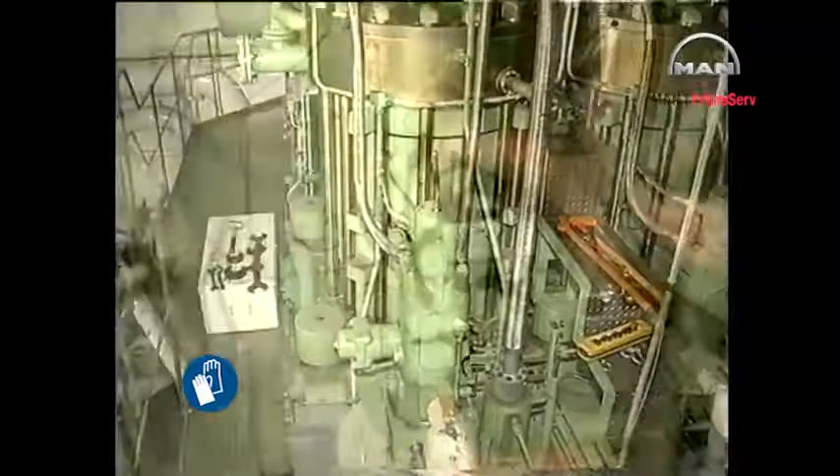Before any dismantling, drain the fuel oil from the fuel oil high pressure pipes. Using a hook spanner, loosen the union nut. Using a spanner, loosen the coupling fitted on each end of the high pressure pipe.

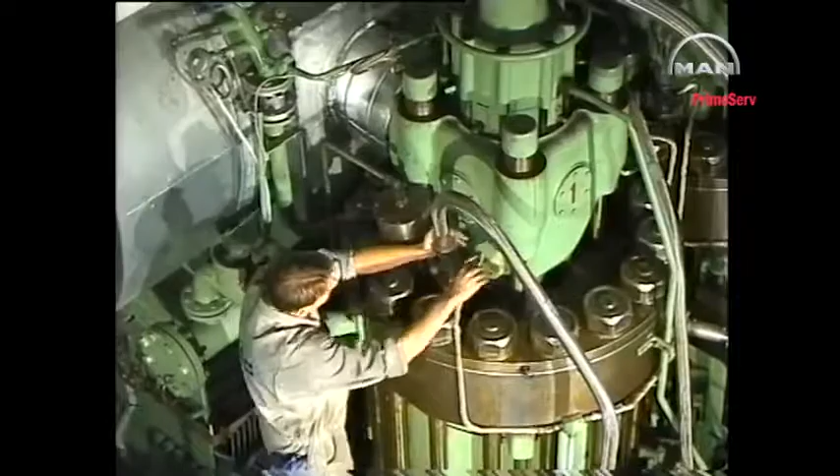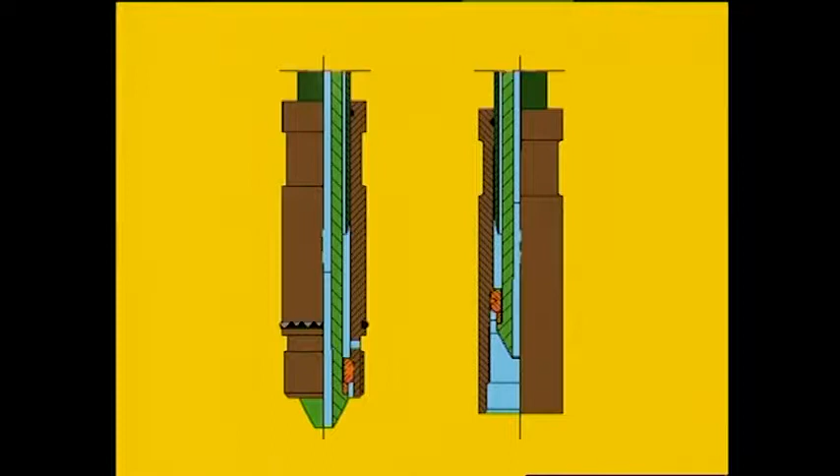The fuel oil high pressure pipes may also be of the double pipe design. See Instruction Book, Procedure numbers 901 and 909. Remove the high pressure pipe, taking care not to damage the high pressure pipe seatings.

Disconnect the return oil pipe from the fuel valve. Mount protective plastic plugs in or on all high pressure seatings. Unscrew the retaining nuts and remove the spring housings.

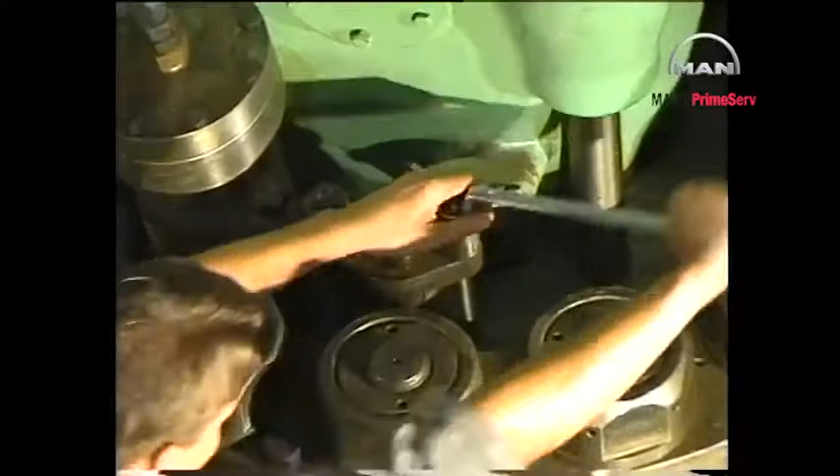Remove the fuel valve from the cylinder cover using the lifting tool if the valve sticks.

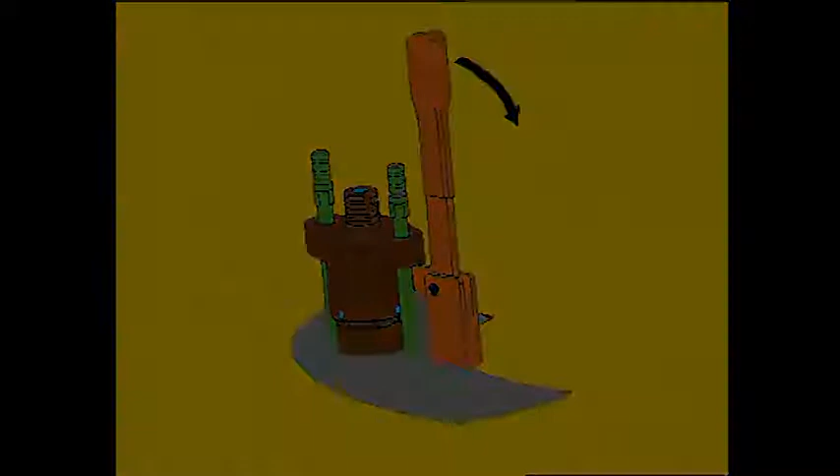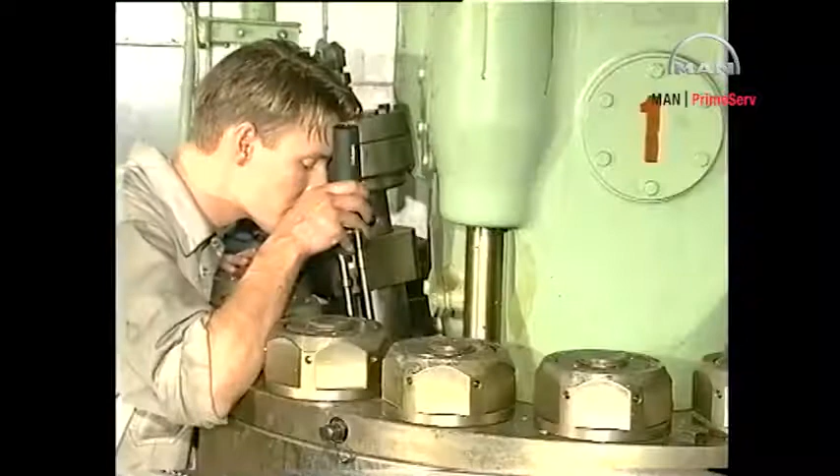Thoroughly clean the fuel valve bore in the cylinder cover. Clean off any carbon deposits in the fuel valve bore with a carbon cutter.

If marks are found on the seating in the bore, recondition the seating with a seating face cutter. Finally, grind the seating with a grinding mandrel and a grinding compound, for example carborundum number 200.

After milling and grinding, thoroughly clean the bore and seating and check again that there are no signs of damage on the seating.

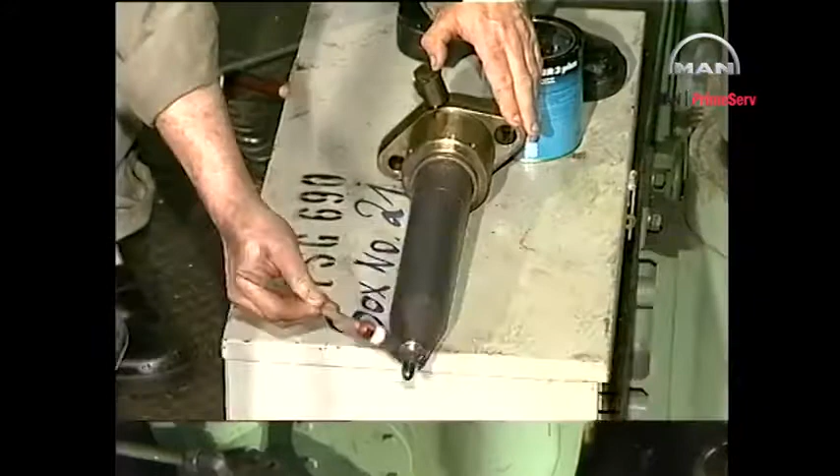After reconditioning the seating in the bore and thoroughly cleaning both bore and seating, fit new O-rings on a new or overhauled fuel valve which has just been pressure tested, and lubricate with molybdenum disulfide. Carefully mount the valve in the cylinder cover.

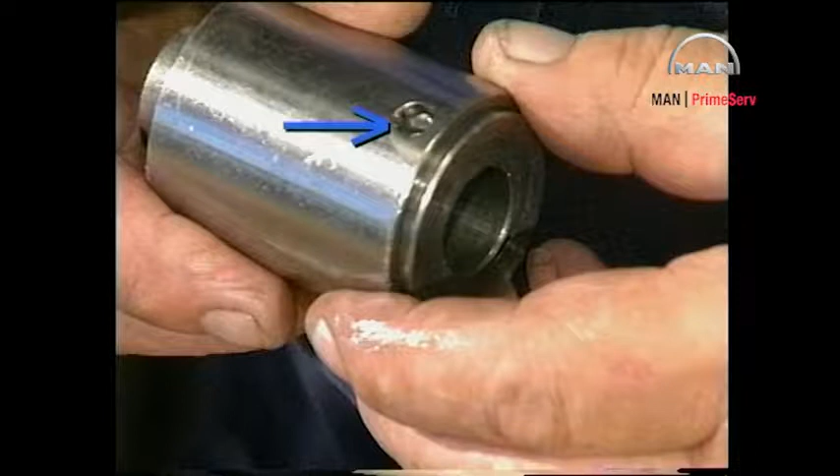To ensure that over-tightening has not taken place, check that the locking and indicating pins have not been bent or broken off.

In the event of over-tightening, mount a new spring housing. We recommend that the calibration of new and especially old spring housings be checked before they are mounted on the engine or on the fuel valve test rig.

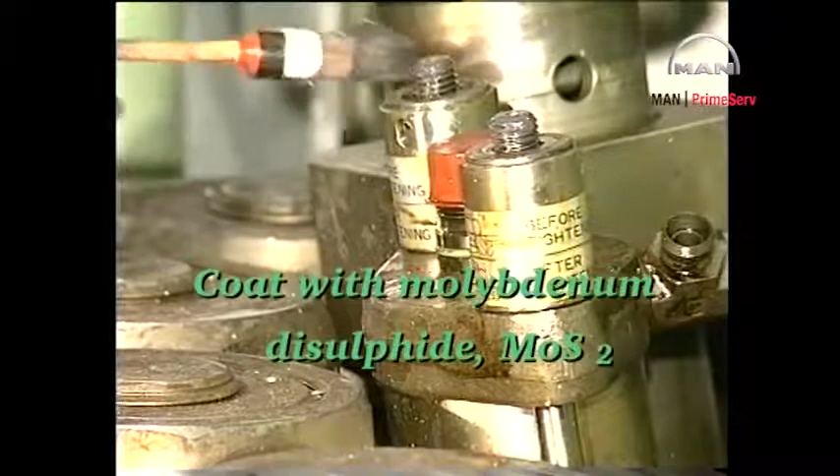Mount the spring housings and retaining nuts. Tighten the nuts until the top face of the pressure disc is flush with the top face of the spring housing.

Reconnect the return oil pipe to the fuel valve.

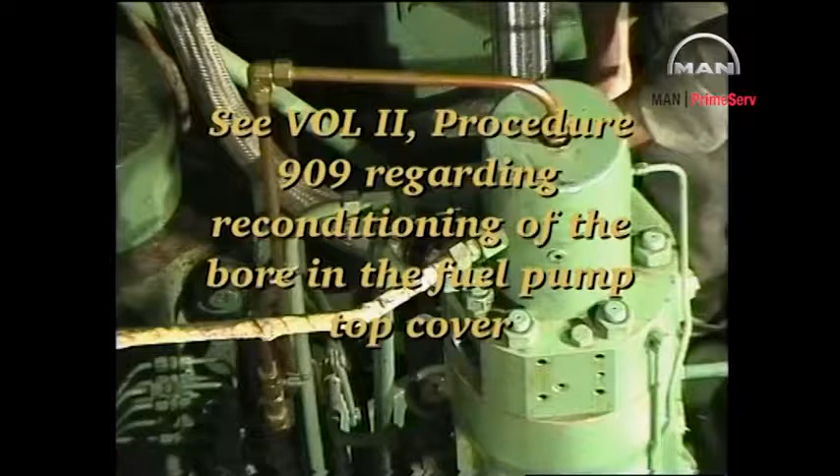Check that there are no marks on the seating surfaces of the fuel oil high pressure pipe. If necessary, recondition the seatings as described in procedure number 909.

On fuel oil high pressure pipes which are provided with a steel armoured protective hose, also check distance D, that is between the thrust bushing and the pipe end. See procedure number 909.

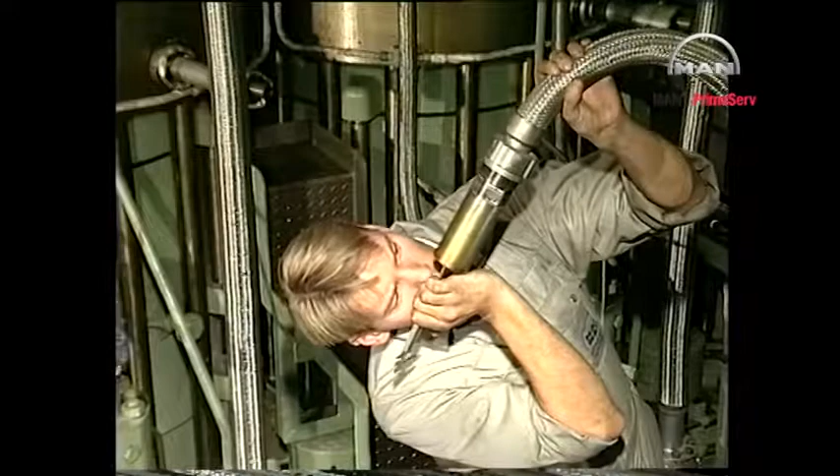Replace the O-rings and coat with molybdenum disulfide. Mount the fuel oil high pressure pipe.

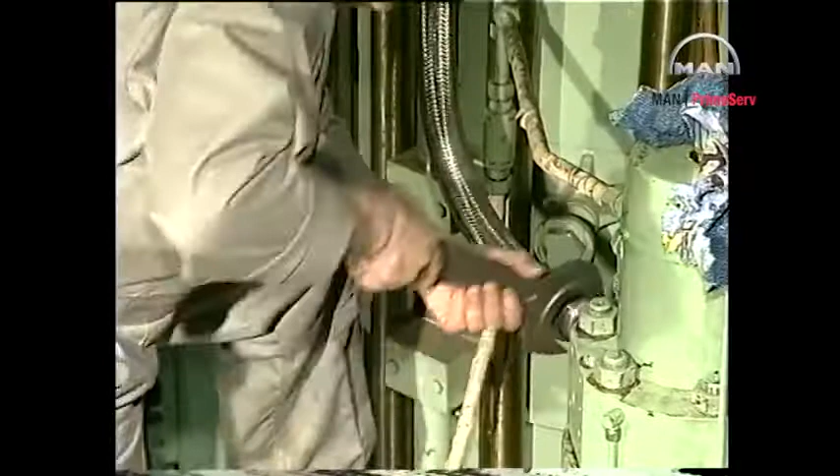Adjust the torque spanner to the value indicated in procedure number 901. Tighten the coupling pieces using the torque spanner. Using the hook spanner, tighten the union nut.

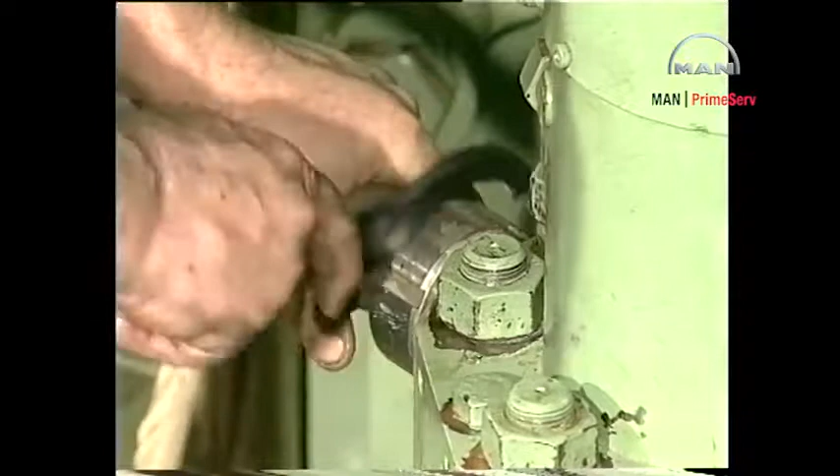Close the fuel oil drain valve. Turn on the fuel oil supply.

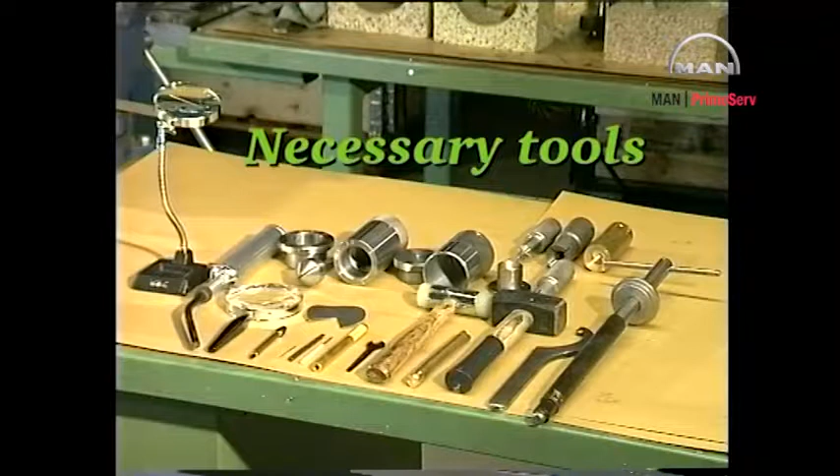Remove the sealing rings and the plastic plugs.

Set up the fuel valve in a bench vise provided with soft jaws. Start disassembling the fuel valve by screwing off the union nut with a hook spanner. When overhauling fuel valves, handle all parts with the utmost care and keep them completely clean.

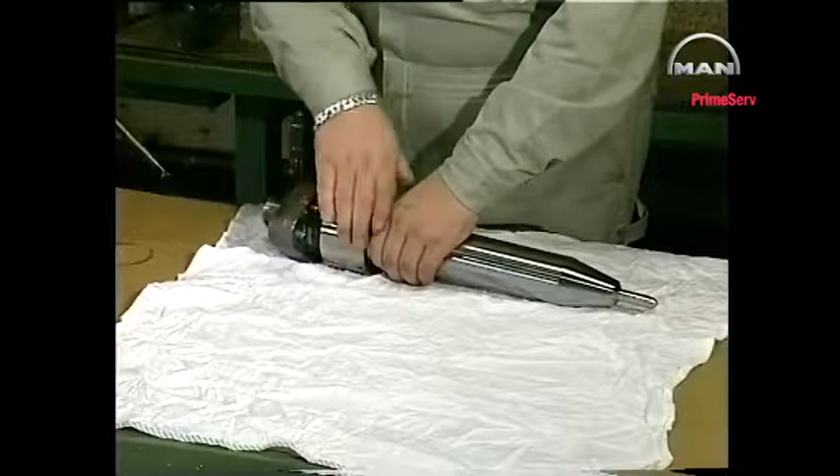Slide the valve head clear of the valve housing. Remove the non-return valve, thrust spindle and thrust foot from the valve housing.

Loosen the spindle guide with a soft hammer and remove the spindle guide and nozzle.

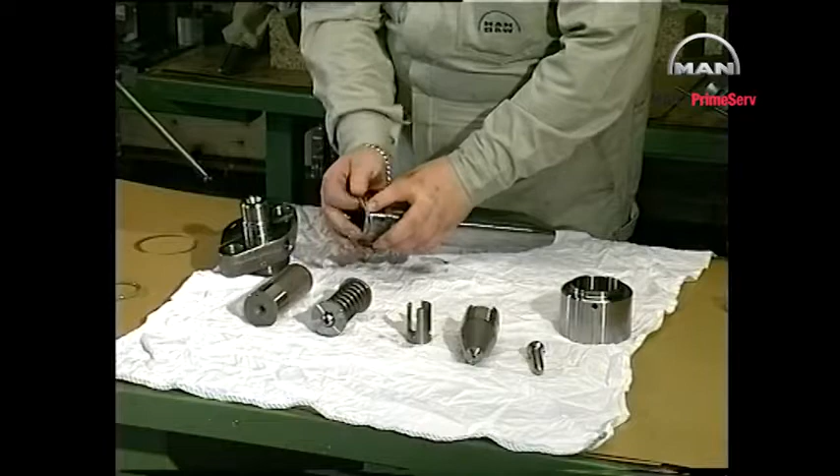Remove and discard all sealing rings. Clean all parts in gas oil and blow clean with compressed air.

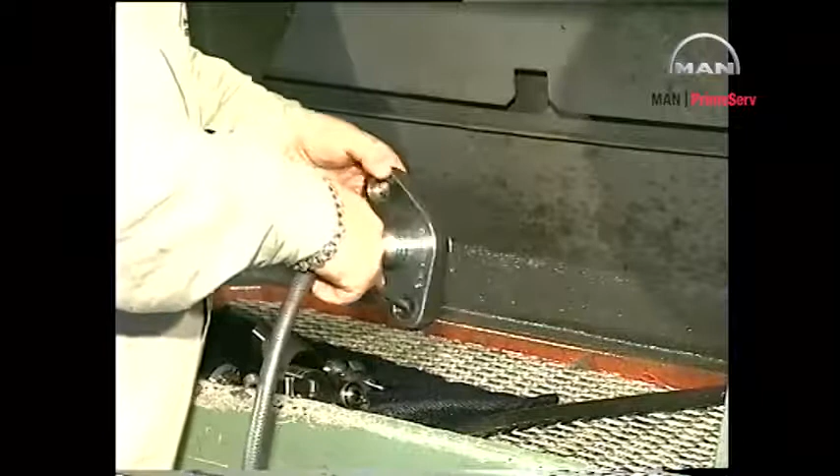Carefully clean and examine the parts and, if necessary, grind the seating surfaces with a grinding mandrel and carborundum number 500.

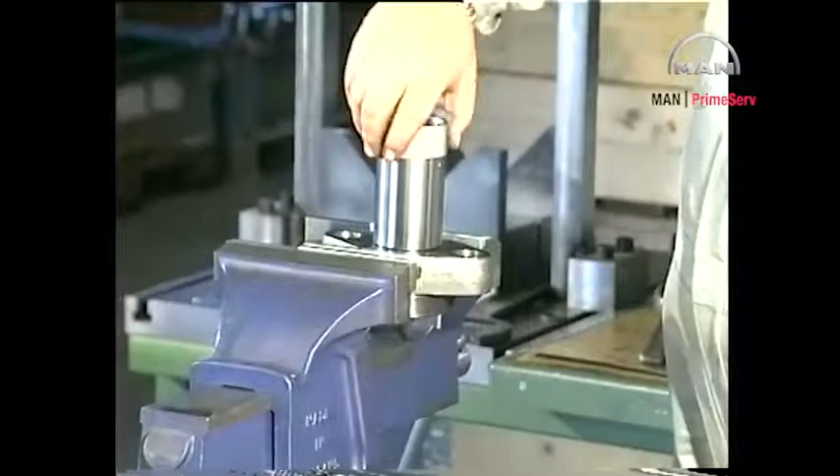Use the milling or grinding tool if more serious damage has occurred on the seating surface for the high pressure pipe in the valve head.

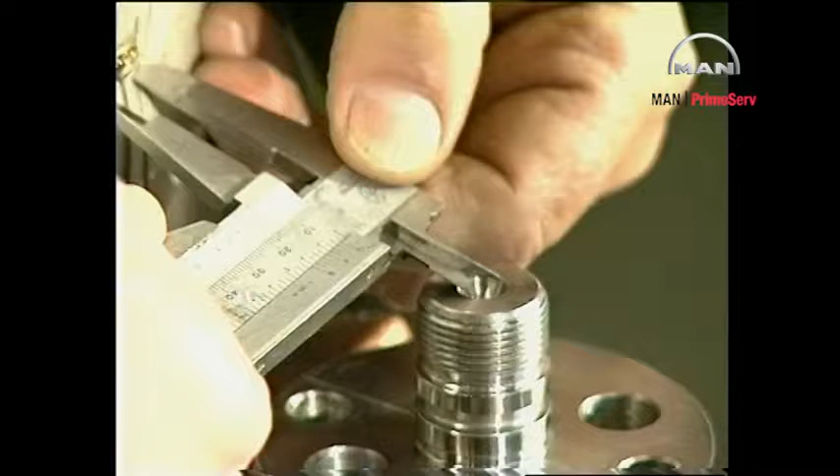Use the milling tool if more serious damage has occurred on the seating surface for the high pressure pipe in the valve head. The diameter of the seating surface must not exceed the value stated in procedure number 909 in volume 2 of the instruction book.

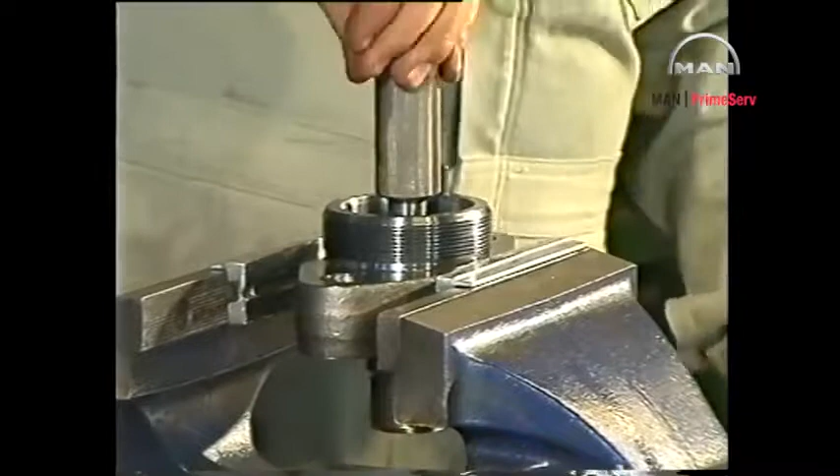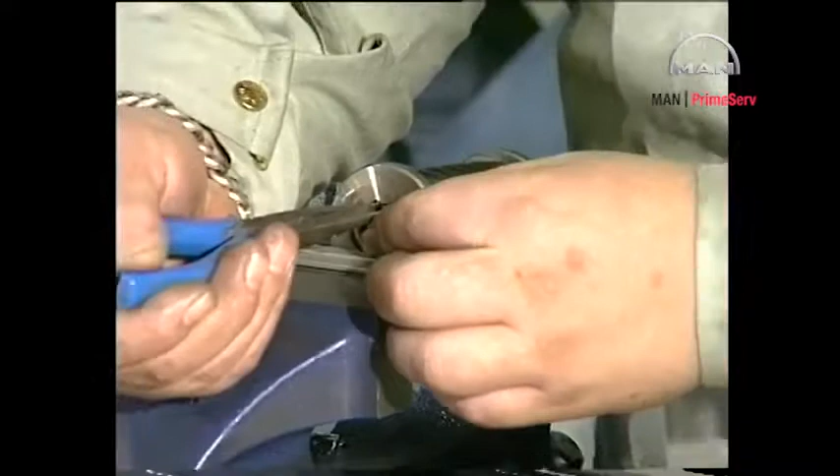Set up the thrust spindle in a bench vise with soft jaws. Compress the spring for the thrust spindle to remove the tension on the circlips and then remove the circlips.

Carefully clean and examine the parts and, if necessary, grind the seating surfaces with a grinding mandrel and carborundum number 500.

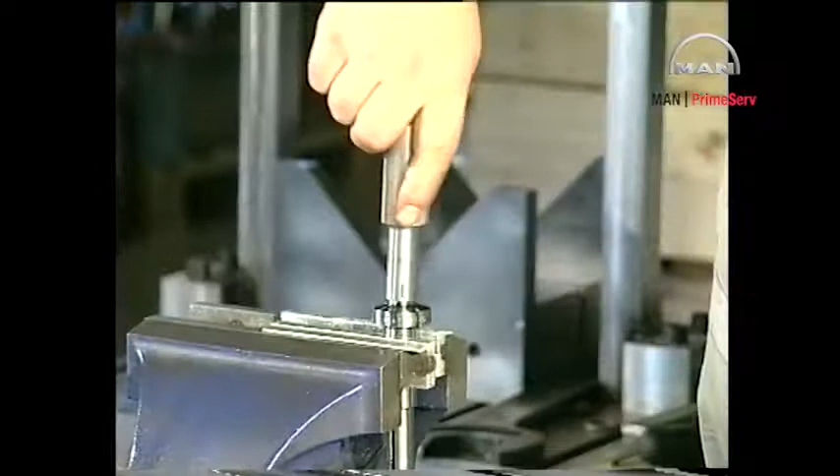Remove the sealing ring from the spindle guide. Disassemble the spindle guide with a brass mandrel and a hammer.

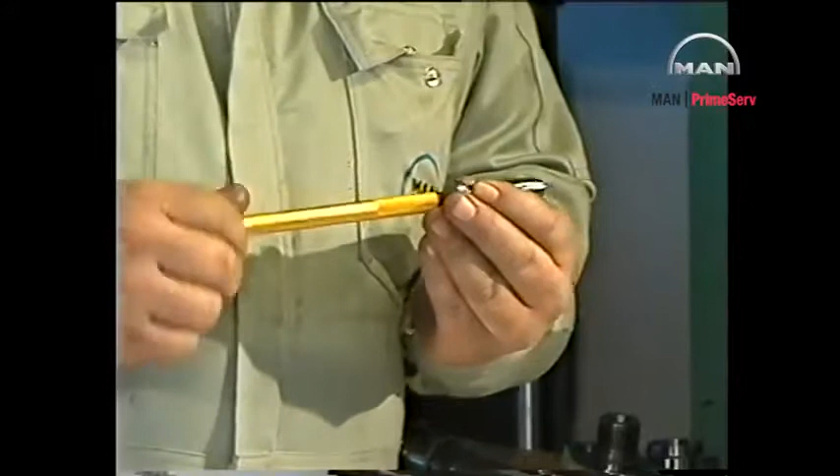Use the special drills to clean off any carbon deposits in the central bore of the fuel valve nozzle or in the spray holes.

Test the spray holes with a test pin. If the test pin can be inserted into just one of the holes, or if the holes have become oval, the fuel nozzle must be discarded.

Examine all seating surfaces of the non-return valve and spindle guide through a magnifying glass with 8 to 10 times magnification. If there are pressing-in marks or the like on the seats, mount a new non-return valve or a new spindle guide. Lapping of the internal seatings is not acceptable.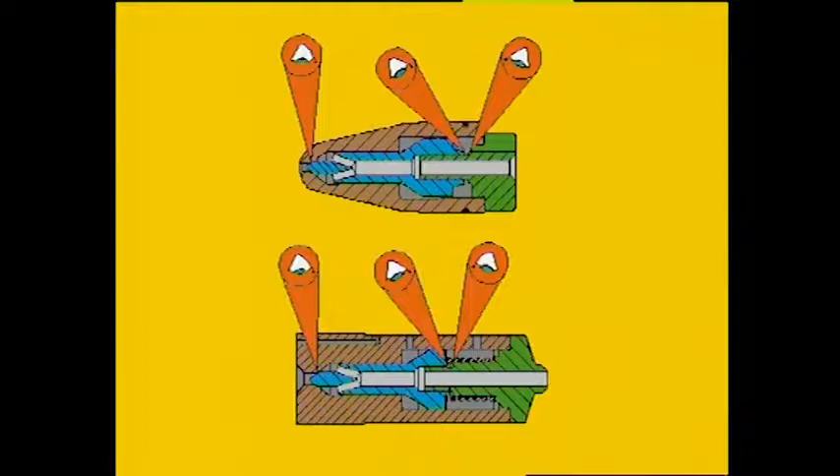Defective parts, with the exception of the spring, cannot be replaced individually.

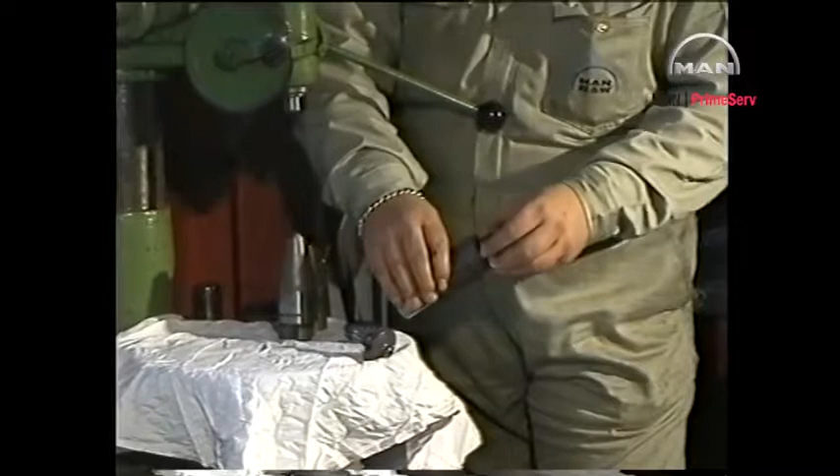Remove any deposits on the sliding surfaces with grade 360 emery cloth and oil. Lubricate all movable parts with molybdenum disulfide. Loosely assemble the non-return valve and the spindle guide.

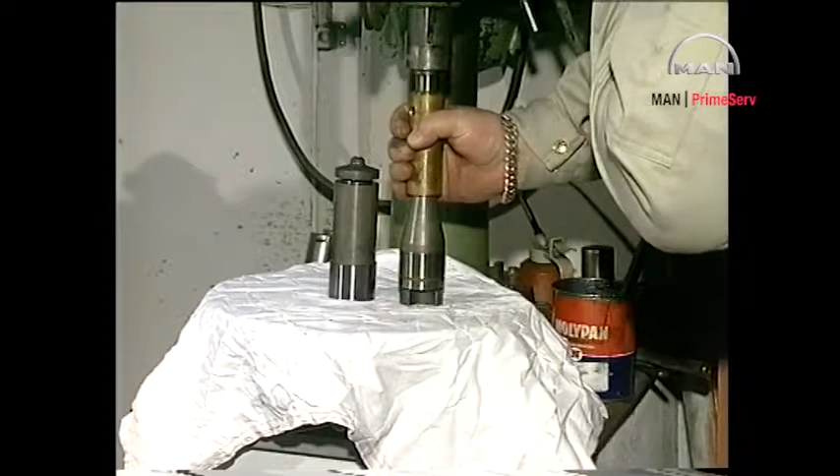Make sure that the parts are perfectly aligned and position the special tool. Fit the parts firmly together by pressing down on the drilling machine handle.

Starting with any additional discs, assemble the thrust spindle.

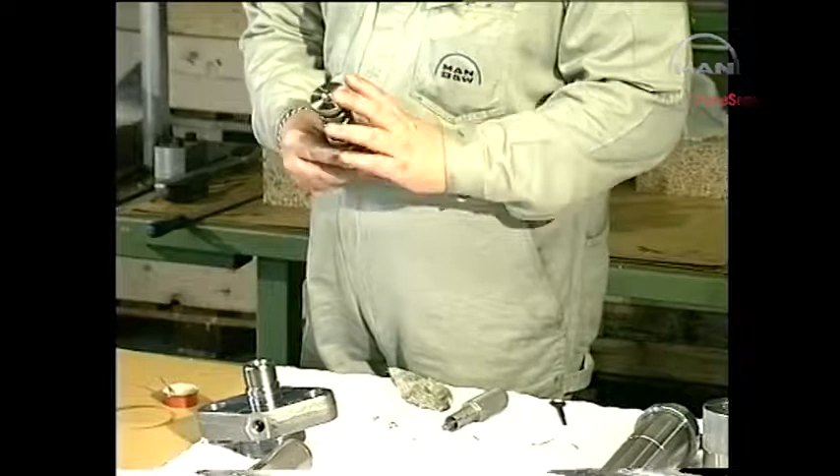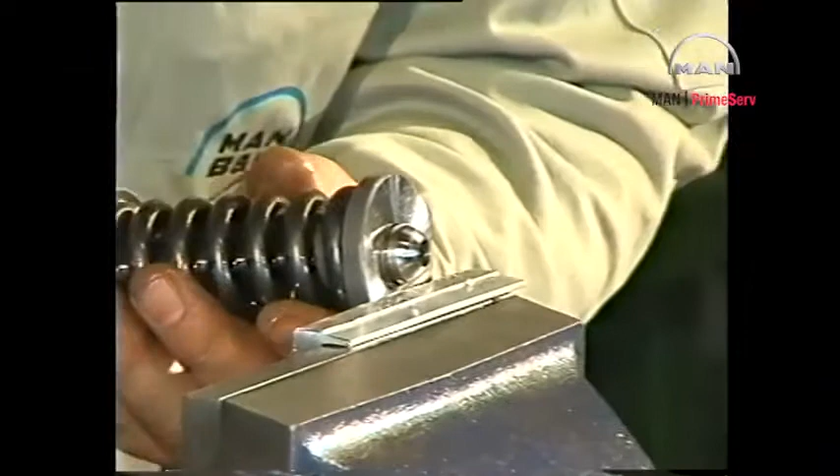Slightly compress the thrust spring and mount the circlips.

Mount the fuel nozzle in the valve housing, making sure that it engages correctly with the guide pin.

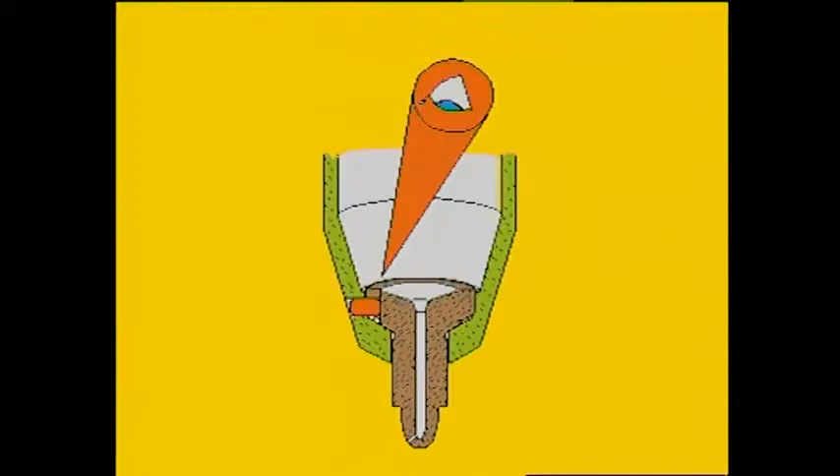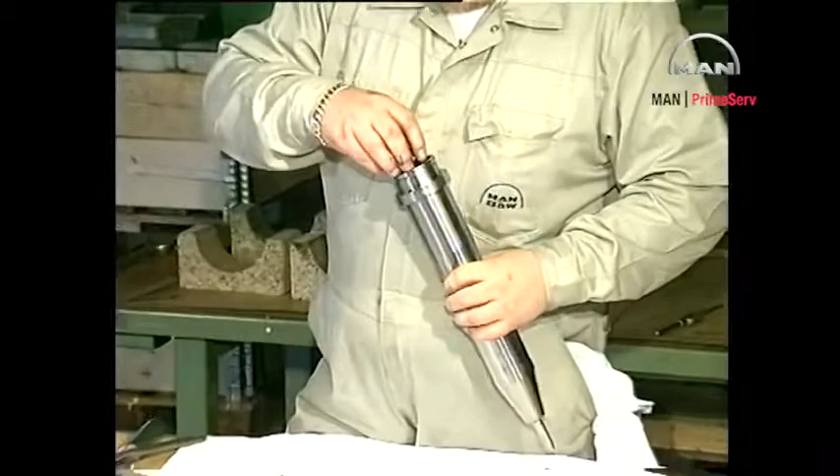Mount a new sealing ring on the spindle guide. Coat with molybdenum disulfide and mount the spindle guide, thrust foot, and thrust spindle with the circlips facing the spindle guide and non-return valve.

Mount a new sealing ring in the sealing ring groove.

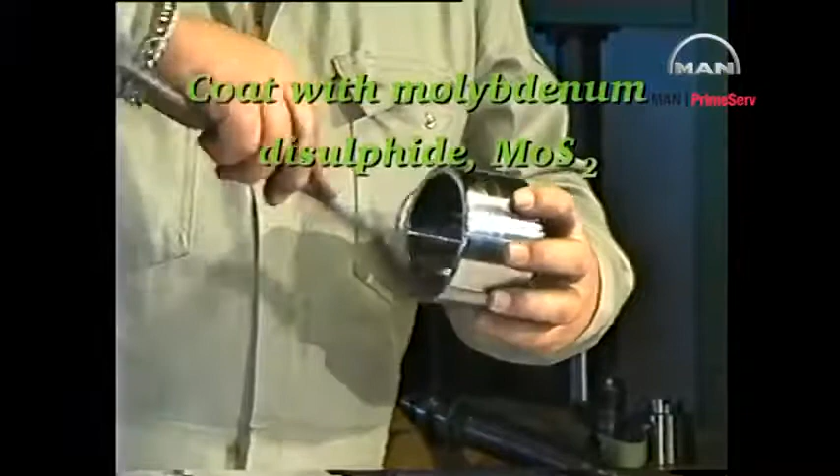Mount the valve head, ensuring that the guide pin between the valve housing and valve head is correctly engaged so that it will prevent the parts from turning in relation to each other.

Mount the union nut and tighten it with a hook spanner.

Mount new sealing rings on the valve head and valve housing and mount protective plastic plugs.

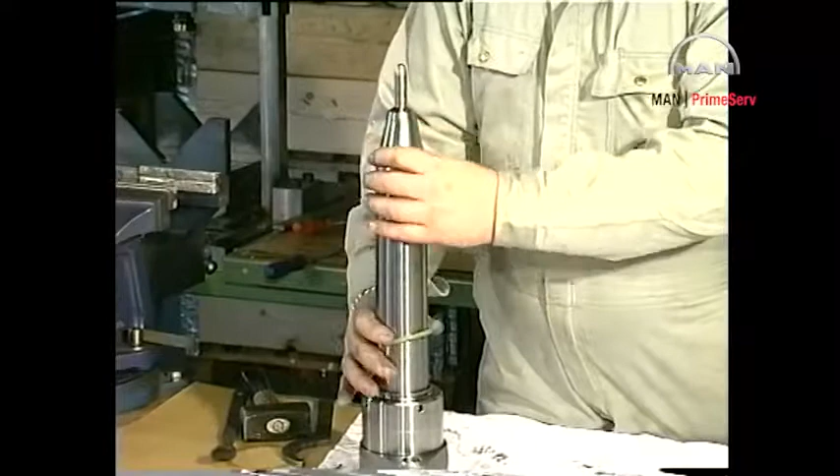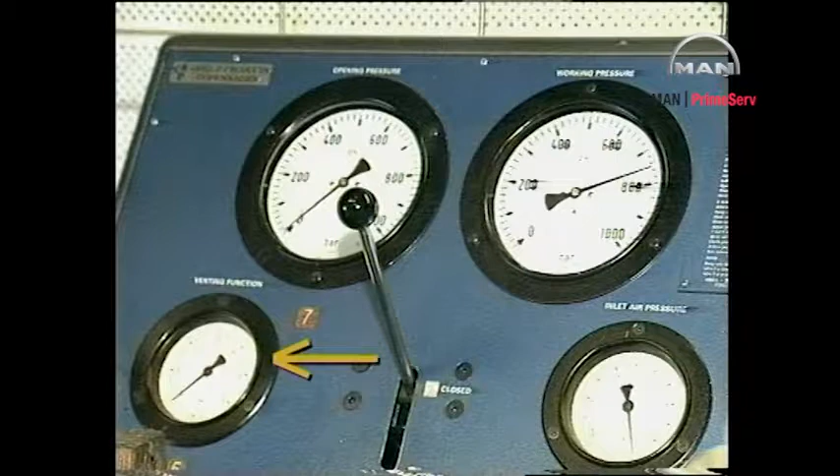Overhauled fuel valves or fuel valves taken from stock must be function tested before they are mounted in the cylinder cover. The pressure testing pump is equipped with pressure gauges for displaying opening pressure, working pressure, venting function, and air inlet pressure.

Position the fuel valve in the test rig. For guidance on how to operate the pressure testing pump, refer to the supplier's special instructions.

To ensure that over-tightening has not taken place, check that the locking and indicating pins have not been bent or broken off. In the event of over-tightening, mount a new spring housing.

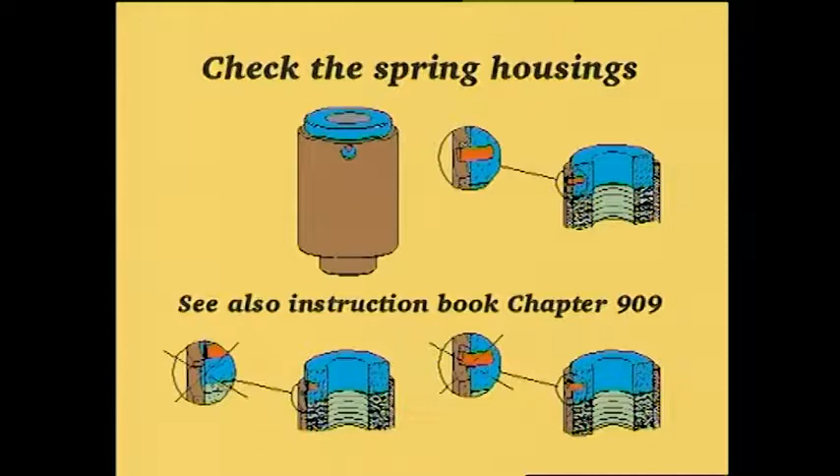A very important element in the correct functioning of the fuel valve, both during testing and in service, is ensuring that the spring housings apply the predetermined tightening force. To ensure that this force is present, a special tool has been designed to check the calibration of the spring housings. We recommend that the calibration of new and especially old spring housings be checked before they are mounted on the engine or on the fuel valve test rig.

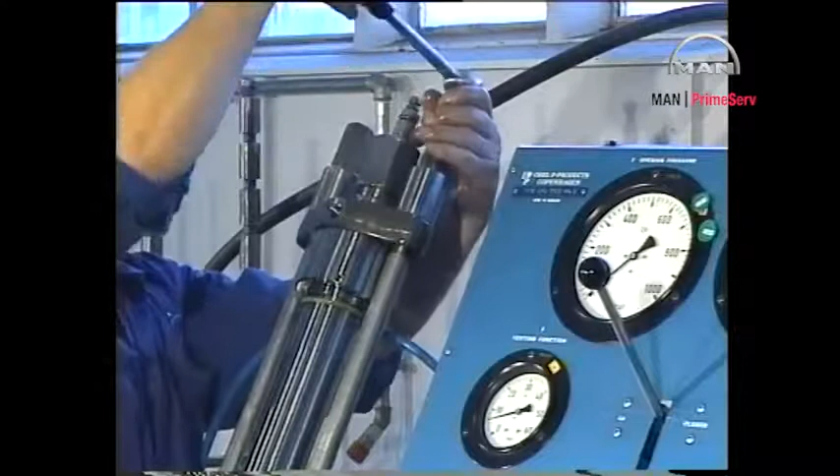Tighten the nuts until the top face of the pressure disc is flush with the top face of the spring housing.

Connect the pressure testing pump and the return oil pipe to the fuel valve.

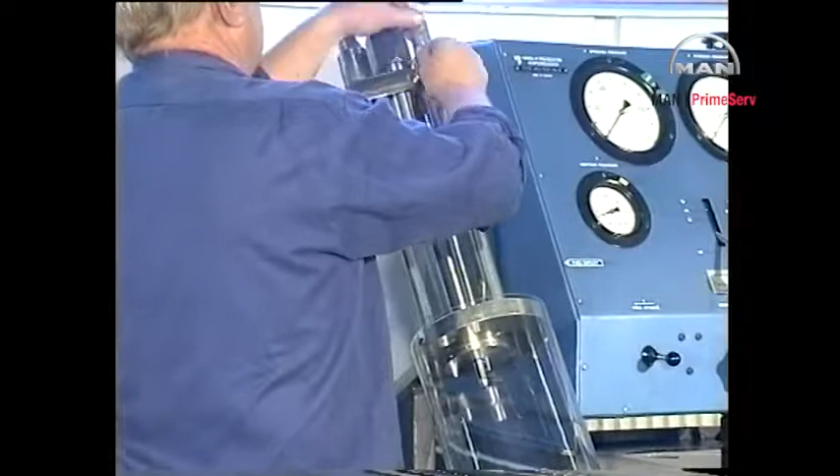Slowly fill the valve by pumping at low pressure until oil, without air bubbles, flows from the return oil pipe.

Raise the pressure until it is above the opening pressure.

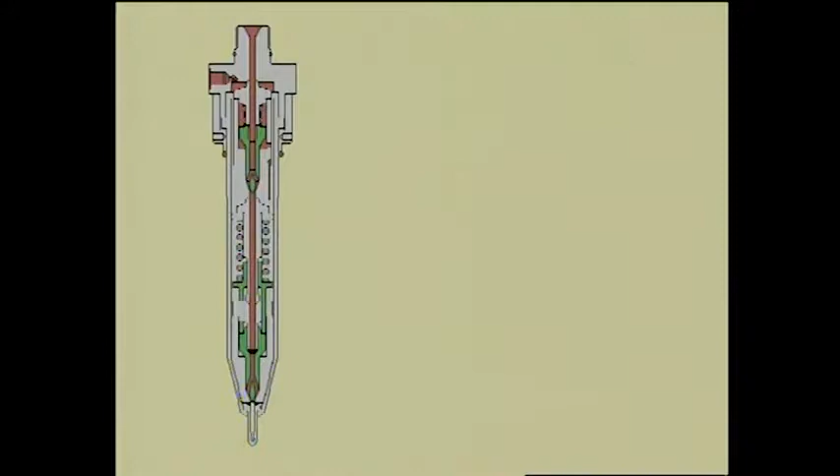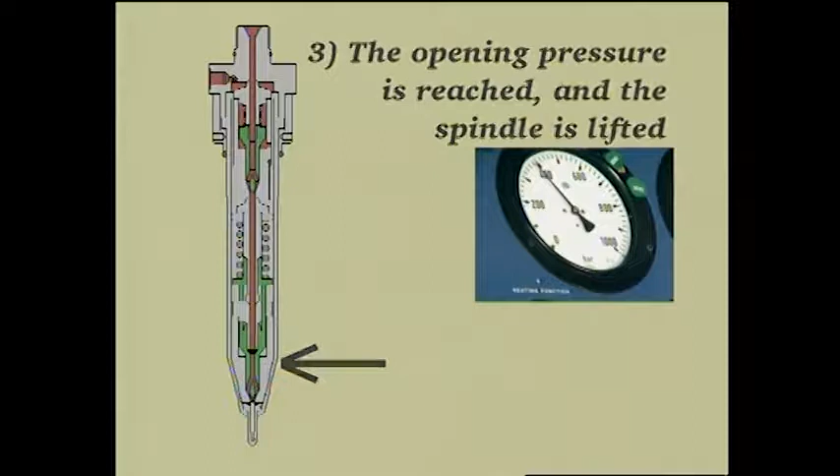Flush the valve for about 5 seconds.

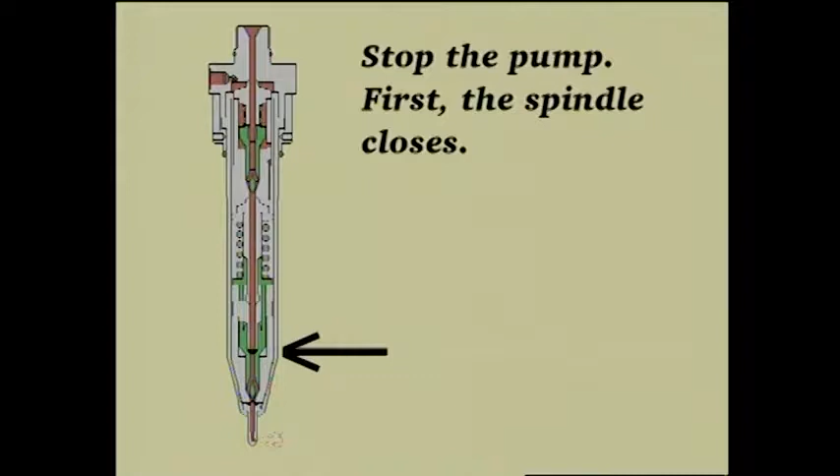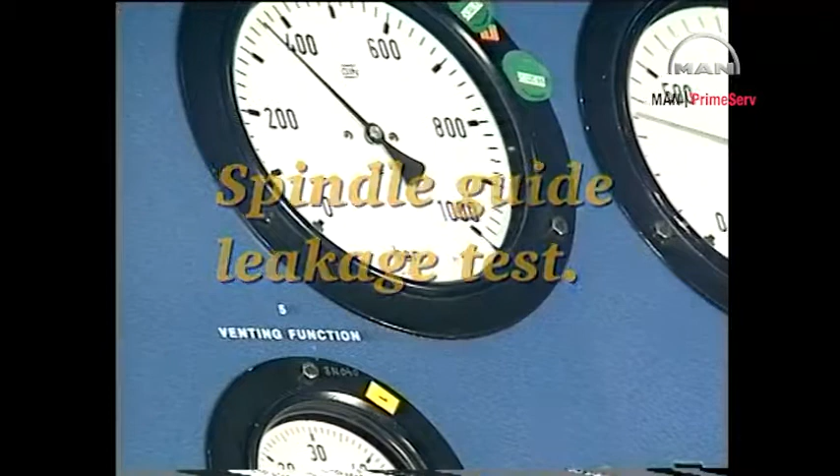Slowly increase the pressure until it is about 50 bar below the specified opening pressure. See Instruction Book Volume 2, Procedure number 909.

There will always be a certain amount of oil flowing from the return oil pipe when the fuel valve is full of oil and pressurized. Oil must not seep from the fuel valve nozzle holes until reaching a pressure of 50 bar below the specified opening pressure. If oil does seep from the fuel valve nozzles, see Procedure number 909.

Lapping of the internal seatings is not acceptable.

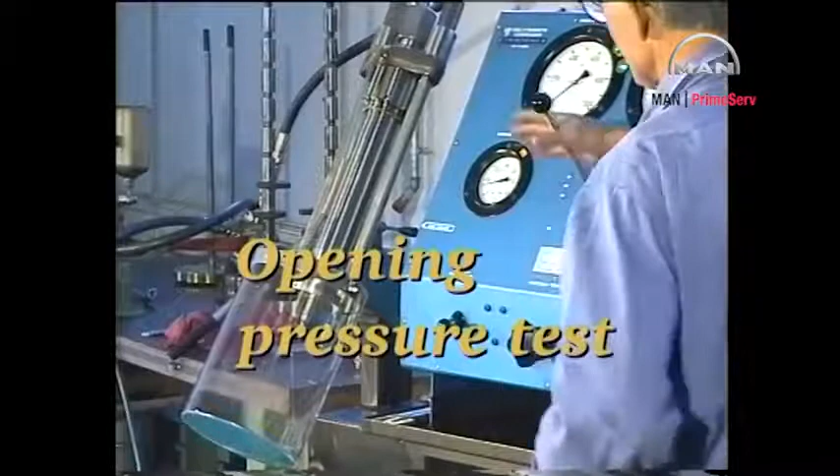Pump 5 to 10 strokes to fully open the valve and to blow out any dirt. Then relieve the pressure.

Slowly increase the pressure until oil is emitted from all the atomizer holes.

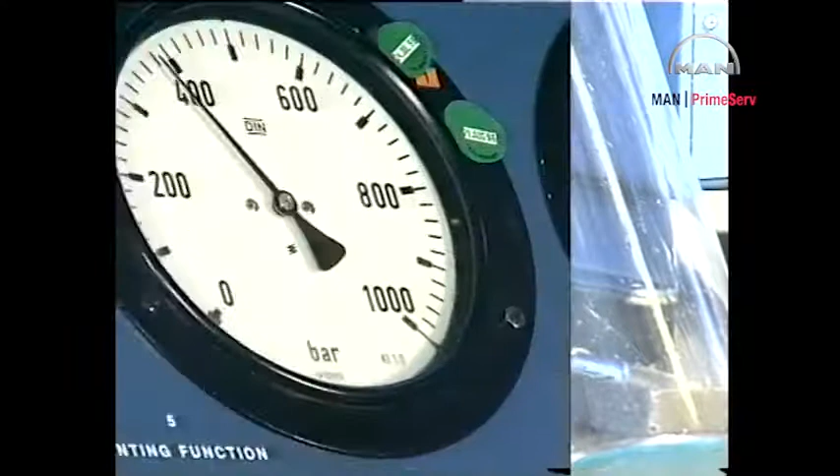Read the actual opening pressure on the pressure gauge marked opening pressure. Compare the actual opening pressure with the pressure specified in procedure number 909 and, if necessary, insert or remove discs or replace the spring.

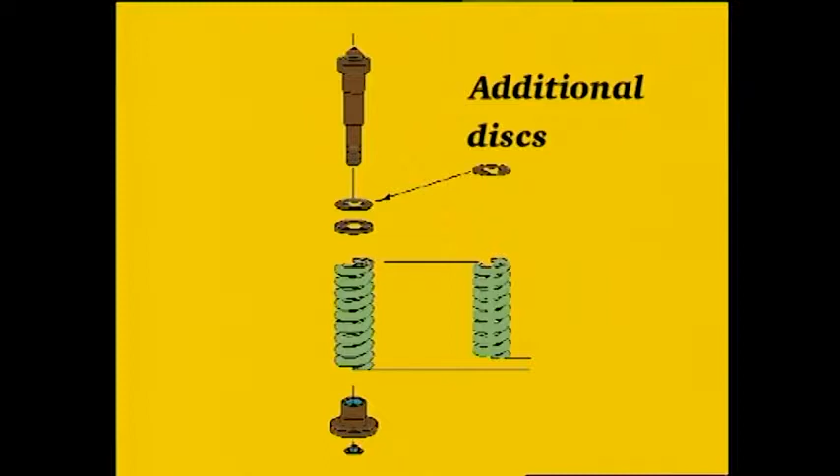Set up the thrust spindle in a bench vise with soft jaws. Compress the spring for the thrust spindle to remove the tension on the circlips and then remove the circlips.

Starting with any additional discs, assemble the thrust spindle. Do not insert more than 5 extra discs when adjusting the pressure.

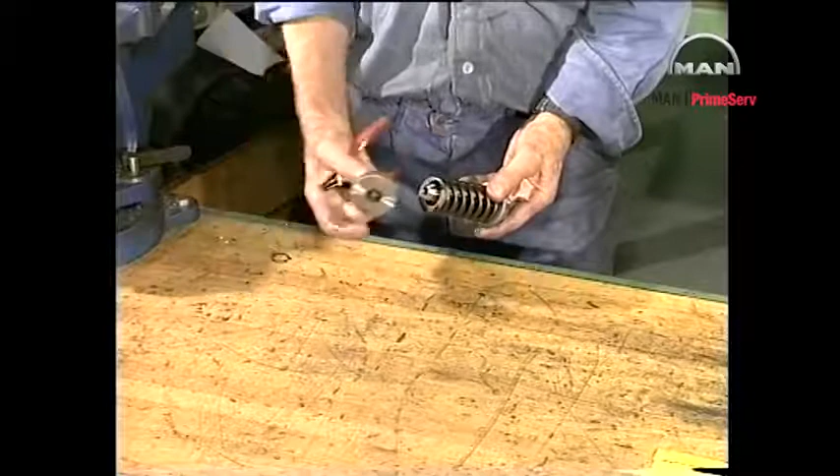Slightly compress the thrust spring and mount the circlips. The fuel valve must be retested after any adjustment.

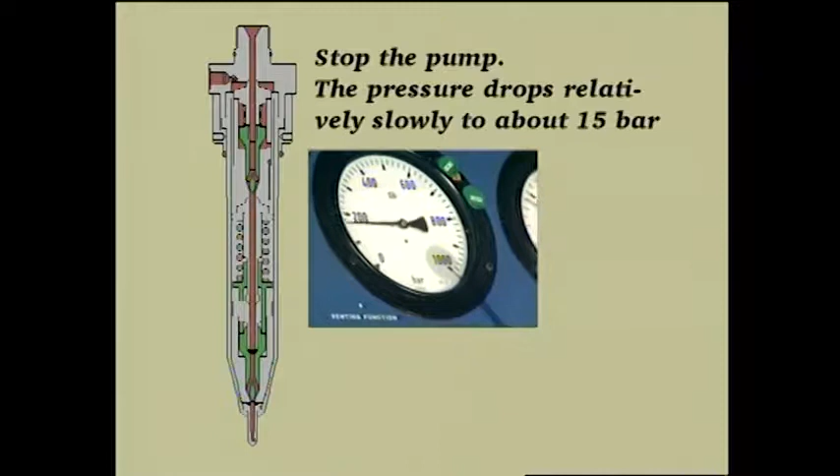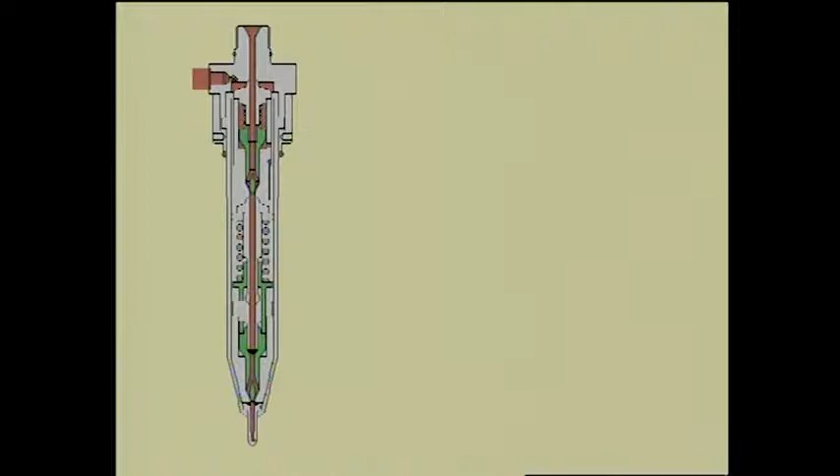If the quick pressure drop cannot be registered, the slide is sticking or the hole is blocked. Disassemble and examine the parts, replace if necessary.

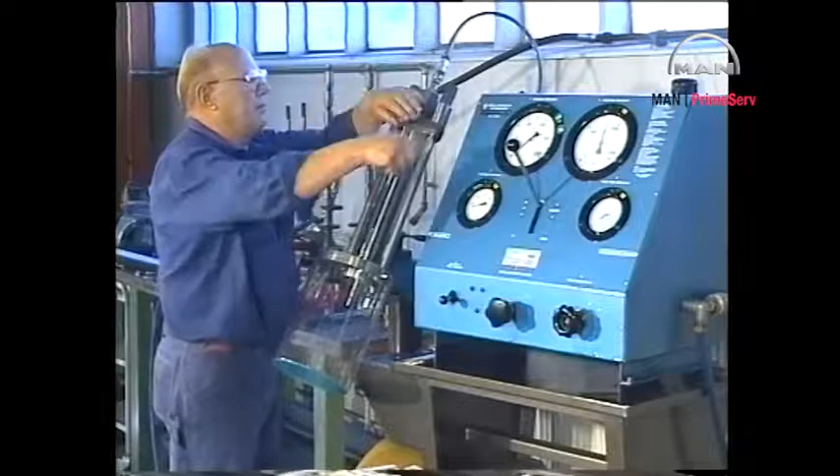Slowly fill the valve by pumping at low pressure until oil, without air bubbles, flows from the return oil pipe. Remove the return oil pipe and block the outlet hole with a gasket and a plug screw.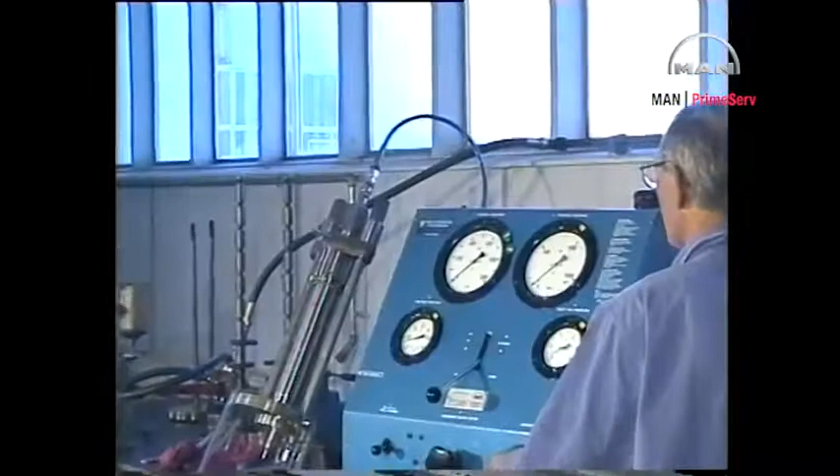Increase the pressure to about 100 bar and move the control handle to the closed position. The pressure should now remain at 100 bar.

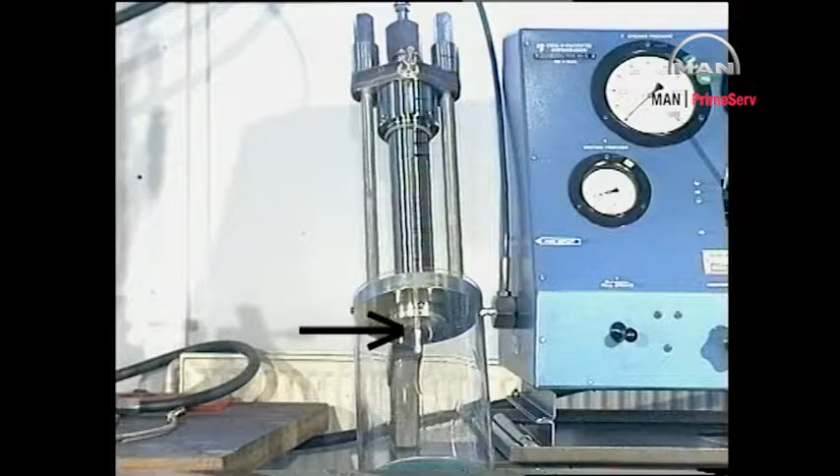If oil leaks at the union nut, replace the O-ring seal of the valve head. If oil leaks at the lower end of the valve, replace the O-ring seal on the spindle guide. After the fuel valve has passed all the tests, it can be mounted in the cylinder cover.